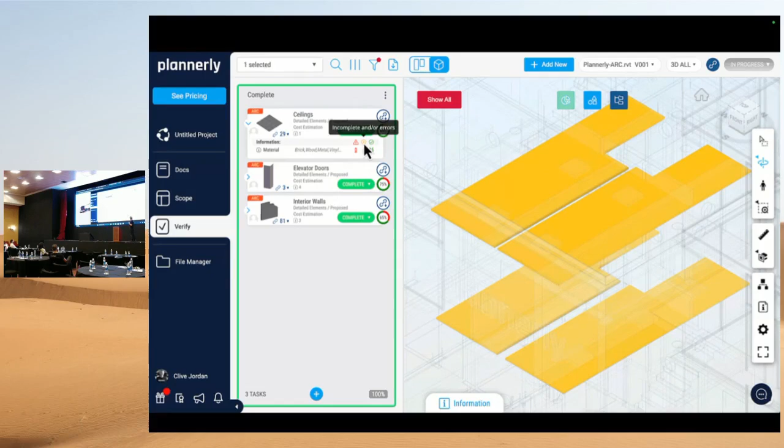And the beauty of this is that when it's machine-readable, we can also hook it up automatically to check the outputs. So the model, we can color code based on whether it meets those requirements or doesn't. So you can really quickly go through this process because we're all talking the same language. So this is what we're going to go through today, these steps. First of all, a very brief introduction to IDS, Information Delivery Specifications.

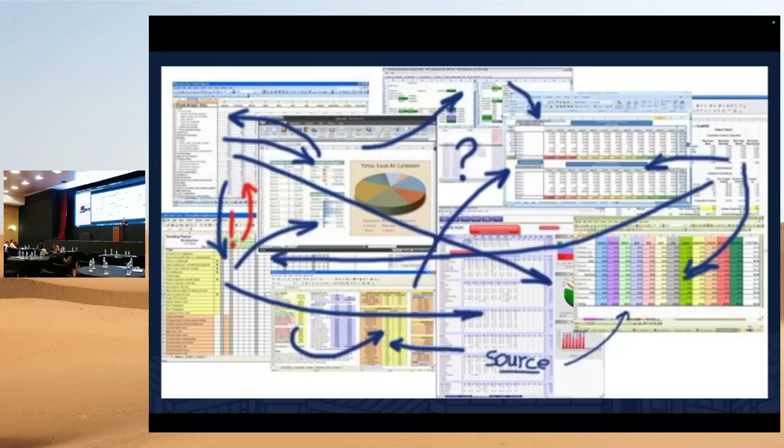It's kind of solving this challenge. So you're probably pretty familiar with lots of different ways of using Excel and a whole bunch of other tools. They're fantastic tools, but they're incredibly flexible, and it causes confusion when you're using them to create scopes that are in completely different forms and formats. So in steps this wonderful workflow from buildingSMART to say we need to standardize things.

But if we can define information requirements in such a structured way that people can understand them, interpret them using machine readable and also automatically checking, we won't have the discrepancies. We won't be reactive on the back end. So that's a beautiful place to wish us to be. How do we get there?

So if you are following along, go to plannerly.com and there's a join free button in the top corner. This is going to take us through those steps, and I'm sure we can share the slides afterwards so you can use them. There's a few animations in here that you can follow along at home when you're really wanting to get into the IDS groove.

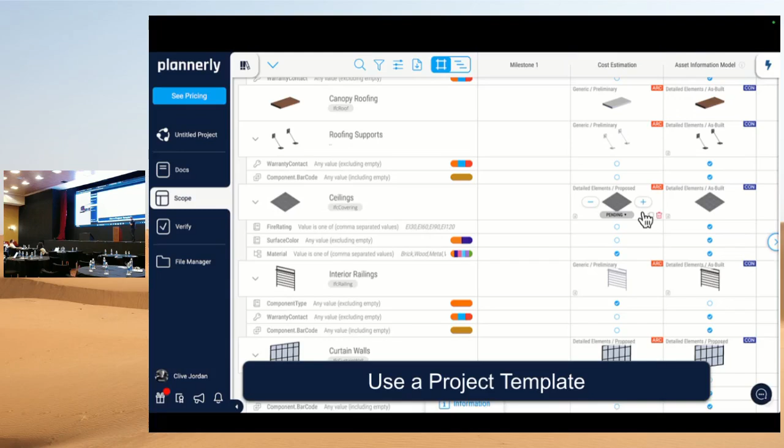And now if I expand all of those rows that were brought in, we can see interior walls and doors and elevators, etc., over those two use cases with the information requirements defined. And this set of requirements can then be exported, and it's a bigger data set. It's a lot easier to define these. It's a database, so you can cut and slice it. You can export maybe just the structural requirements as an IDS for this stage, for this specific use case. So once you've defined it once, you're able to reuse these as project templates time and time again.

And in this example, we're going to say, okay, we've got a great big database of requirements. I'm going to export now this set of requirements. I could choose, for example, filters to say just this team's requirements, just this tag, just this type of set of requirements data that's needed, and put this into a file that we can also add an e-signature to. So now there's a set of requirements that actually becomes contractually obligating as well.

And once this is defined, it's stored in our file manager, and it has a fixed page which has your signatures on, project-based signatures, much more secure than any other tool where you might have to download a PDF and send it through email, or one of the other tools that maybe isn't project-based and doesn't have the accountability involved in them being invited to the project and going through that workflow. Okay.

You could use that IDS somewhere else. So you could import that into, as I mentioned, Solibri. We also have that third step there, so docs, scope, and verify. And in the verify module, we are showing these cards, these tasks, and we're starting to see which ones teams are saying they are completing. And they are cards, they can be dragged and dropped. It's just like a Kanban board, drag and drop each task to status it.

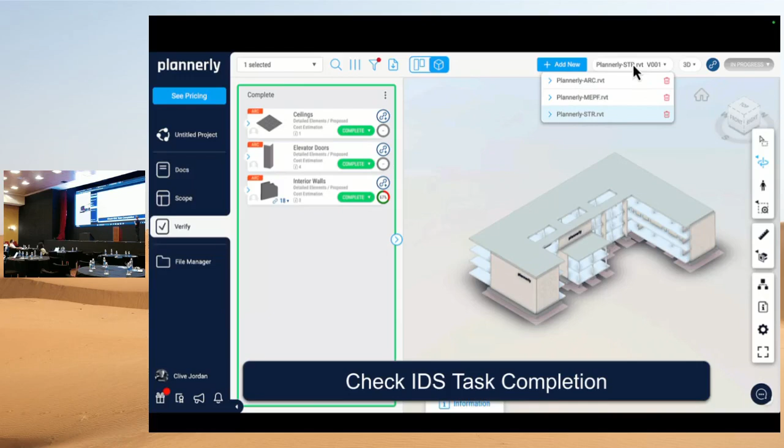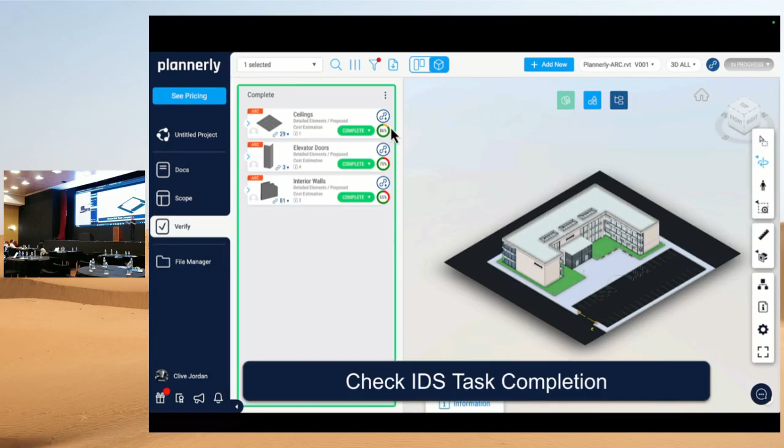So once we've seen which tasks are completed, we can then bring a model in or connect into any other one of these 70-odd file formats, Revit, IFC, DWG, etc., SketchUp files, anything that has geometry and data. And now when we open that model, it's now connecting to show there are 29 ceilings, there are 3 elevator doors, there are 81 interior walls, and the percentages 86, 75, and 65 are the data completeness. That's how much the information that's in the model meets the information that's set as the set of requirements in your IDS.

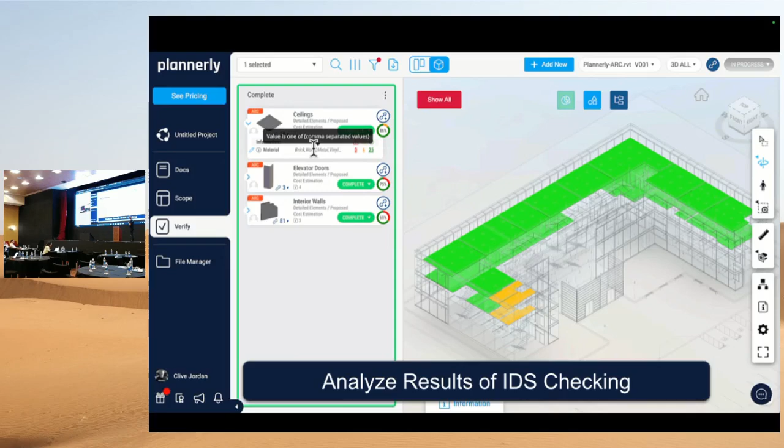And then when you're wanting to review them, you're simply clicking on each one of them, and it will color code to say, all of the green stuff, that's good, it's complete. But if we open up that card we can see that there are 4 of those ceiling objects that are not meeting the requirements, and simply by clicking on those 4, we can see exactly which ones they are and start to not create that error report, but actually the person that's submitting the model is the one that is saying, oh, I'm not quite finished, I'm going to go and fix this before I then turn this model from being in progress to being shared.

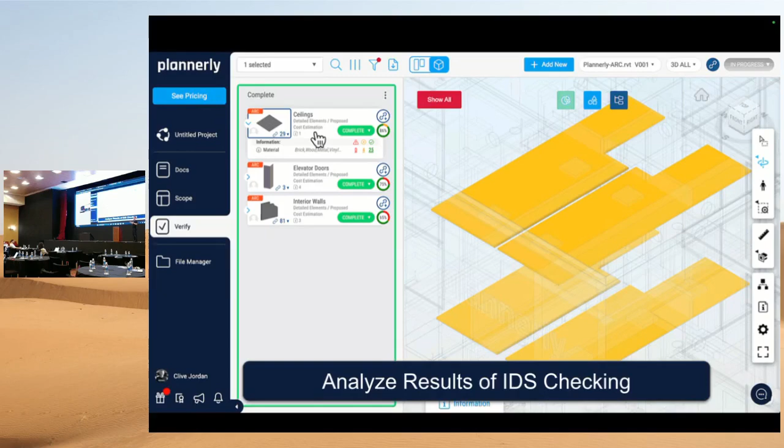So this principle is that we are able to define information requirements in a machine readable, in a human readable way, and connect it right the way through to the deliverable and display whether we are meeting the requirements in an automated fashion. That's what I wanted to share.

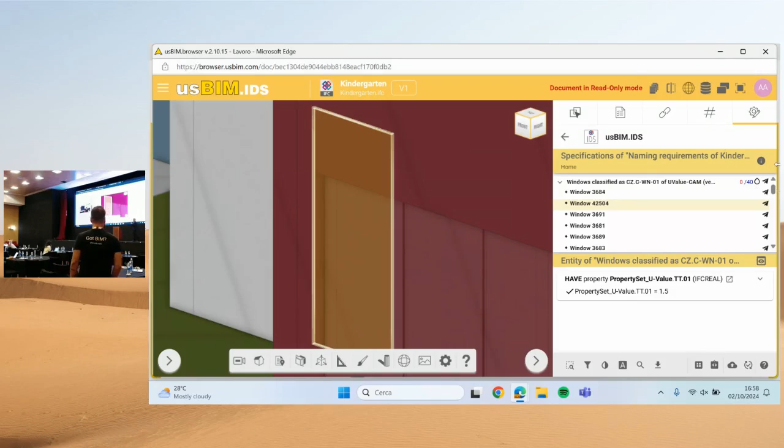Thank you, Ivan. Good afternoon, everyone. I will start to show you some slides, and then we can try to make some exercise with you, if you agree. So can you, okay. Is it not this one? No. Just a second. Okay. Thank you. Giuseppe will help me to scroll down the slides. Okay, let's start very quickly. Go on, Giuseppe, please.

I'm Andrea Aiello, and I work for ACCA Software. I hope that you know already this company, but we are very focused on the Open BIM world. And we have this platform called usBIM that's very easy to use and focused on Open BIM. We implement many standards and many tools, but let's go on. Yeah, this is a little bit the story of ACCA. We are an Italian company. Now we are 35 years old, so we participate in many activities. We have more than 19 IFC standard certifications with buildingSMART.

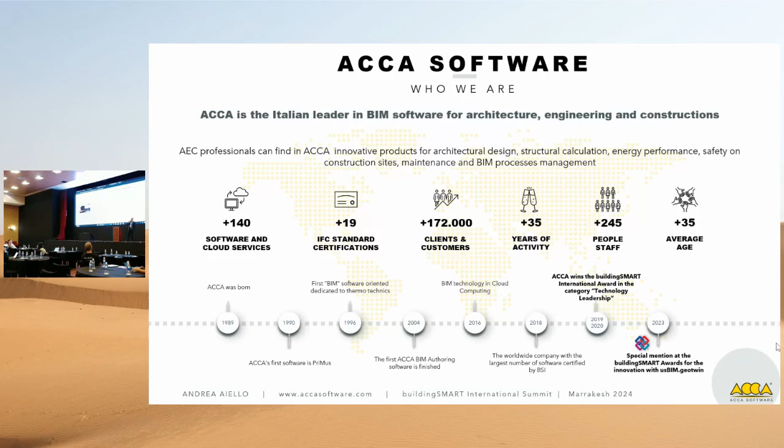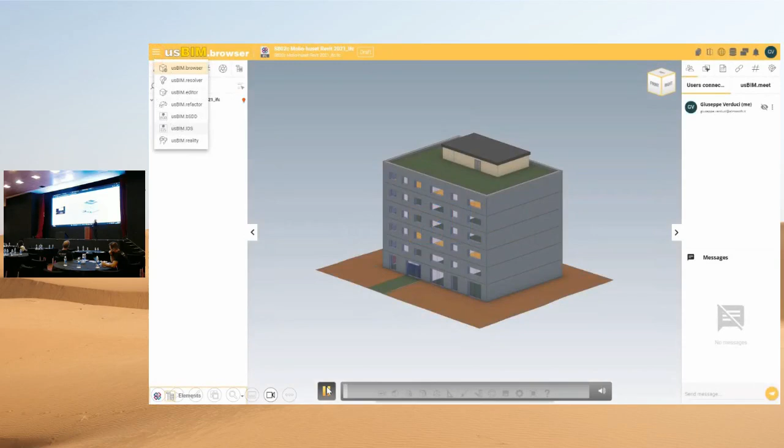Just quickly, I want to show you another video with IDS. usBIM.IDS is the other application that you can use to check the IDS against an IFC file. So in this case, you open the IFC file by using this application called usBIM.browser, then select usBIM.IDS, select the IDS file you want to use, and the software will check whether requirements are met or not.

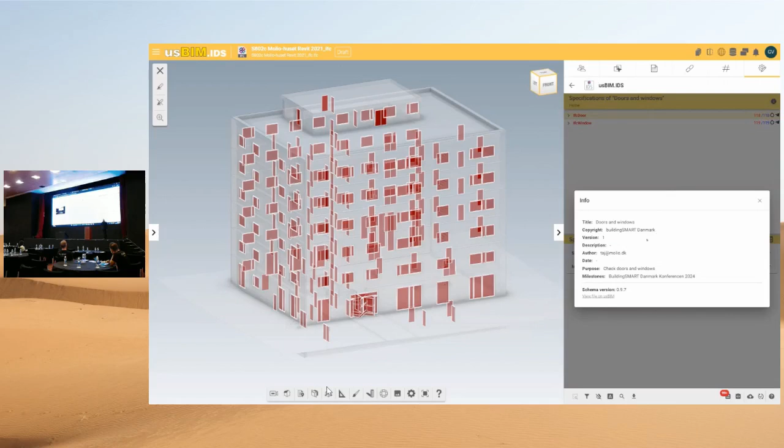In this case, we have many issues, 452, and you click on OK, and you will find here all the information about the IDS, the general data, the first specification, and the specification is red because we have some errors. Okay.

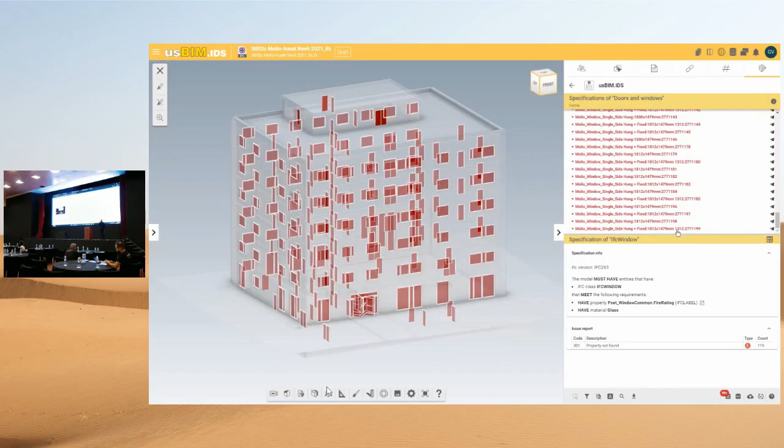Now, if you click here, we have a report of all the error codes belonging to this specification. And if you open it, you will also see all the elements belonging to this classification that are in error. All the red list means that there are some errors. You can select the element with the errors. Here you can see the problem. Where is the problem? Here there's a property missing.

In this case, you can use also this software to change the property. You just click on the pencil and add the property value. So you can use the IDS with usBIM.editor to update the IFC file. If you go on, you can correct all the issues, and at the end you have the IFC file well formatted, well done.

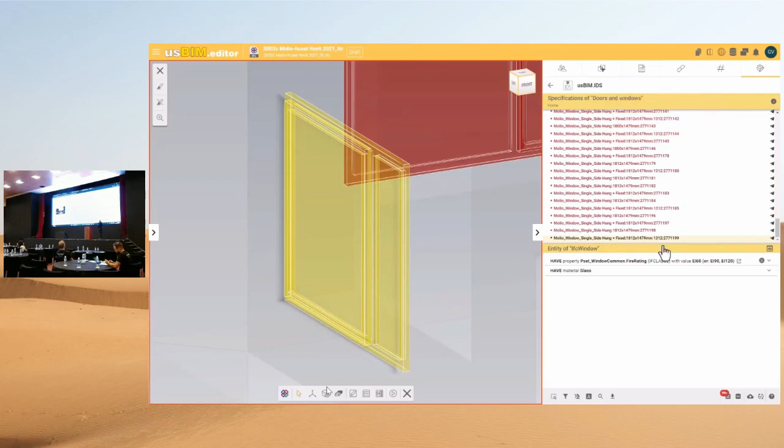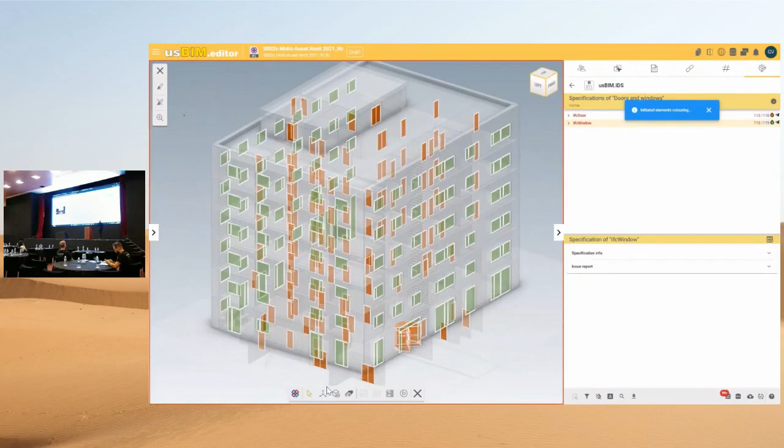In this case, we can add a value from a combo box and so on. And then we have many other functionality to check and to, for example, to color the elements belonging to the IFC file based on the IFC specification. So in this case, the red one belongs to the IFC door and the green one are IFC window.

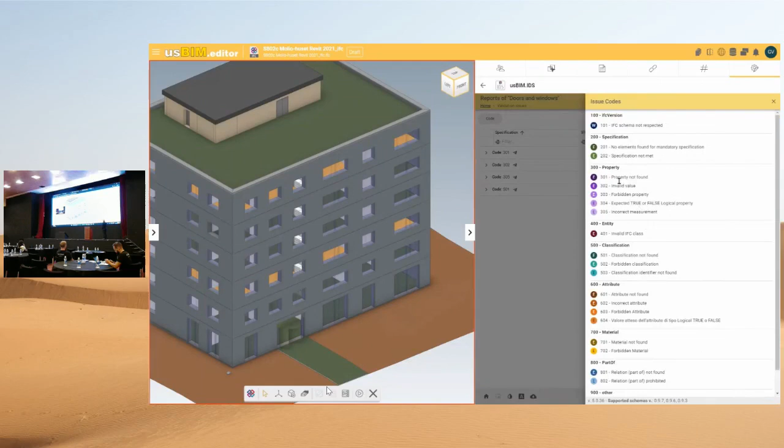We have also an IFC report, a list of all the errors with a table list. We can add some columns to this list, and we can order in different ways. We can group by code, error code. All the errors have been coded and classified, so you will find out which type of error based on the number. We can also see the error code directly on the IFC file, the IFC model.

We can download the issue list by using BCF format, Excel, or CSV. In this case, we have exported by using BCF, so we have all the errors visualized by our usBIM BCF application.

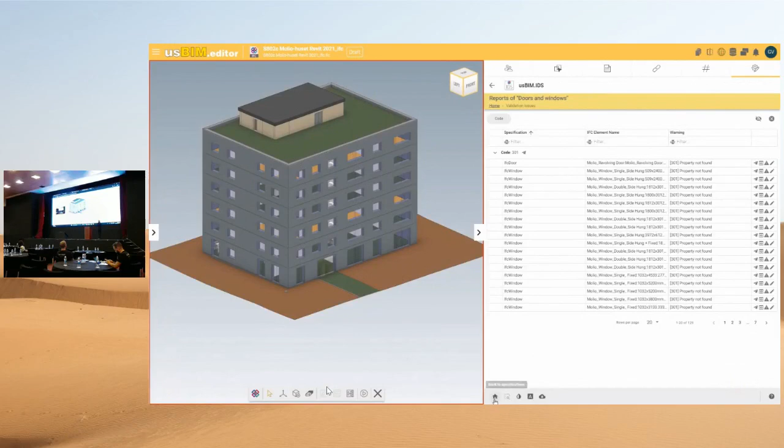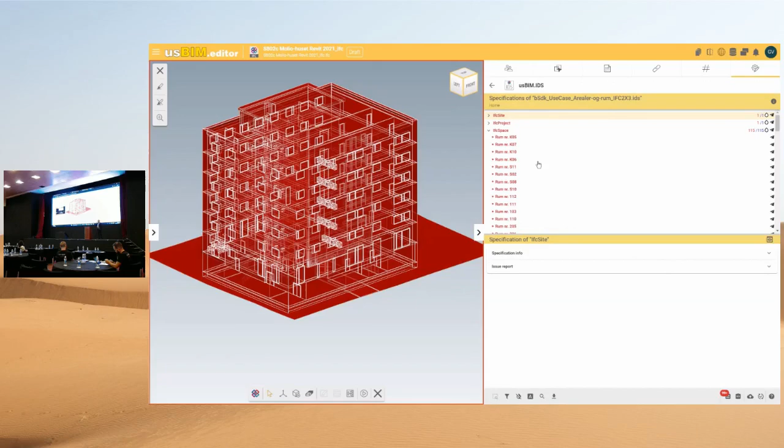We can choose another IDS if you want to check more. So with usBIM IDS, you can check the IFC file against your IDS. And we have some functionality that we have seen. Now I will try, together with you if you want, to do some example.

So let's start by using a very simple example. I go to my computer, is here.

So you should have, I don't know if you have already some folders, but anyway, let's just create a new folder like here, clicking here, my IDS example.

Click on the folder, and now we can start to create a new IDS file. So let's write here IDS, create, name.

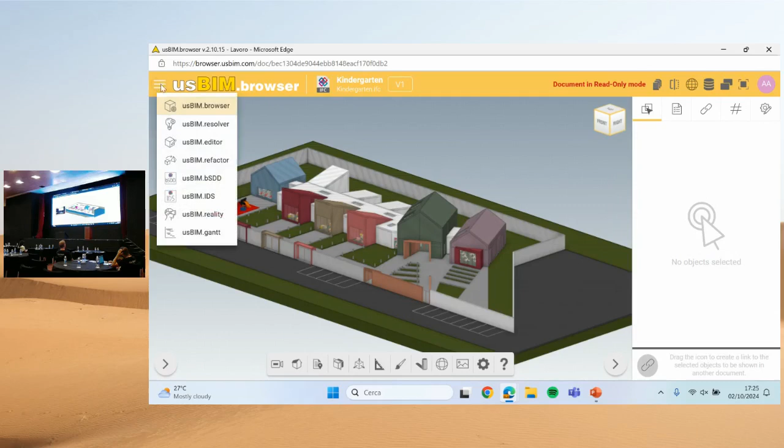I click on IDS, I select an IDS file, for example, select case this one. And now I'm checking this IFC file against this IDS file. First of all, we check that the IDS is well done, so it's well formatted by using the audit tool, and then we do the check.

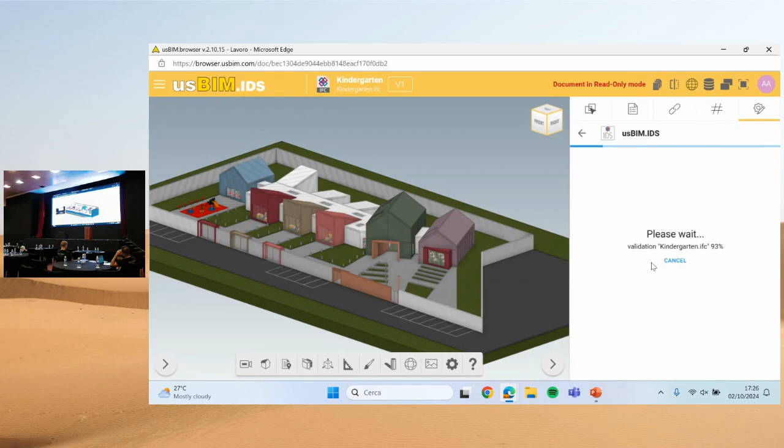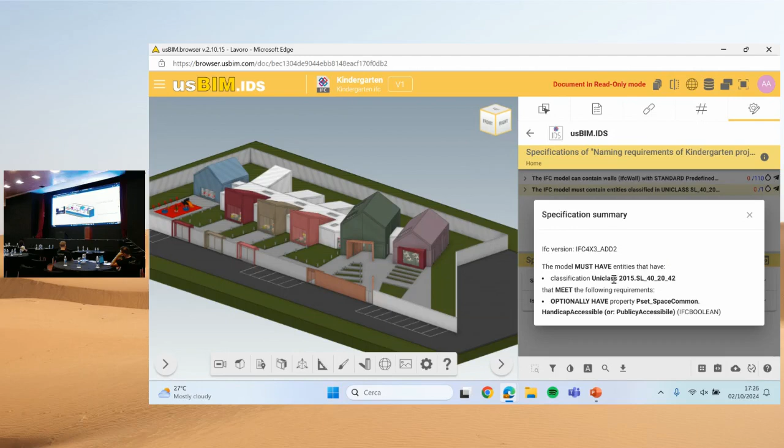Okay, in this case there are no issues. We have two specifications here, the first and the second. If you click here, you read the content of the specification. The model may have IFC wall standard with these properties. The second one is another specification with these other properties and this other classification, uniclass and so on. Under each classification, there are all the IFC elements belonging to this classification.

In this case, all the walls and so on. Here you can see the value of the property required by the IDS, and so on.

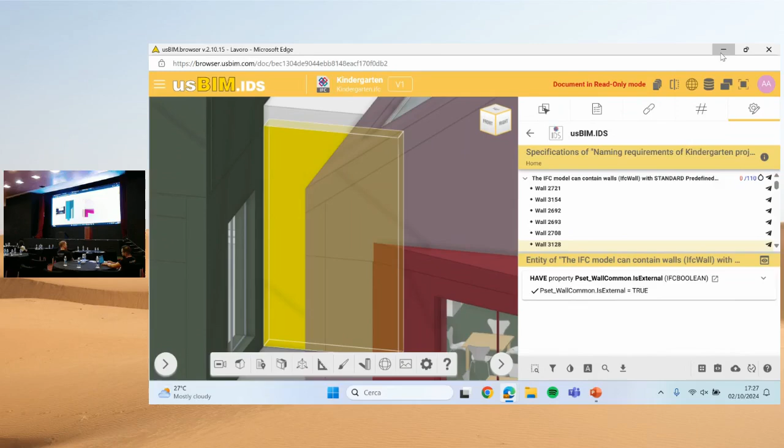So this is a brief introduction of IDS. There are many other specific questions about specific use cases, but I think this is a good start to use IDS. Anyway...

I don't know if you have any questions. Yeah, yeah.

I'm sorry, usually there is a small desk where you can work and talk with the guys and use the computer. Here there's a huge desk, so it's very... Okay, well, thank you very much.

My first question is that every specification is defined at the property level. I have to select an IFC class, go to one of the properties, and say this is the restriction on this property. Mm-hmm, this is an example, yeah.

If you use an IFC class, everything is done at the property level, attribute, properties, and you can also use classification to filter the IFC element.

No, but what do you mean at the property level? Like to specify something for walls, I have to select that I want to specify the name of the wall, and then I select wood. Okay, can I specify anything for wall, like saying the whole wall needs to do that, or do I have to just select a specific property in the class?